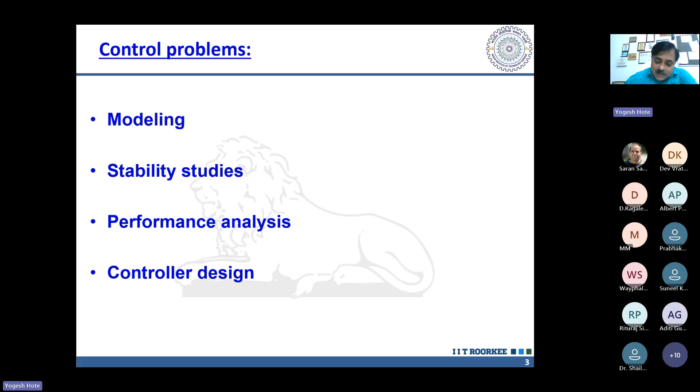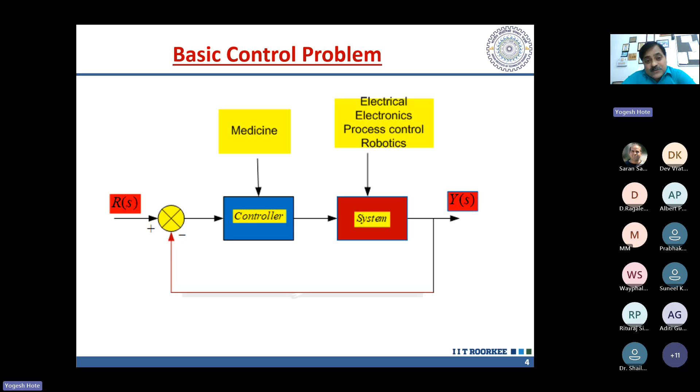According to my view, as the course belongs to power systems, there is a requirement of controlling voltage, controlling frequency, and economical balancing. Nowadays there is also the issue of cyber security related to power plants. So other than power systems, this control is helpful in all types of applications - let us say robotics, process control, electronics, everywhere. So according to my view, this control system or controller is the heart of all types of applications, because if your decision is not correct, everything will fail. Therefore, as a control engineer, we have the option to move to different areas, or work in different disciplines also. That's why control plays a very important role.

Then control theory research areas: classical control, adaptive control, optimal control, nonlinear control, and robust control. So there are different domains of control. Ultimately, our objective is to design a control system for achieving a desired objective with minimum time and energy - that is the ultimate aim of all these techniques.

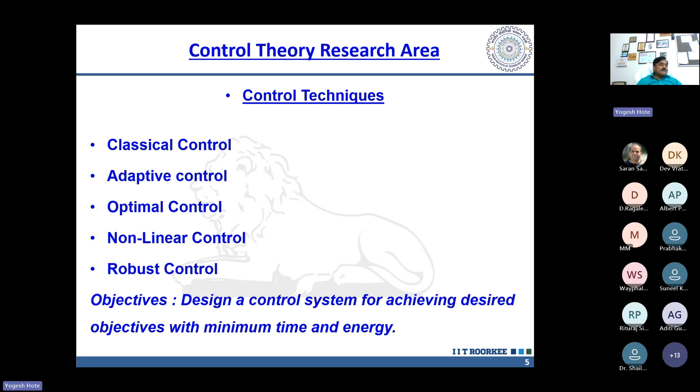Now we go with robust control. Initially we try to understand why robust control is important.

Now you can see a simple feedback control system. H we can say is a certain type of gain. G is the plant, and K is the feedback controller, or feedback gain. So we can interchangeably take any values. Now simply I have taken H equal to 1 by (S minus 1), G equal to (S minus 1) by (S plus 2), K equal to 1.

Definitely in our UG class we'll see such type of example, and we are trying to obtain a performance - how to obtain the performance. We have to check the performance. Simply, what to do now? We have to see if this plant is working properly or not. We have to determine output with respect to reference, Y of S by R of S. Is it correct? We will try to obtain Y of S by R of S.

Yes, okay, so now we have made some simple programming. We have taken plant H, with numerator, denominator, system transformation. Then plant G - you can see this plant G, H and G - we have numerator 1 minus 1, denominator 1, 2. Then we obtain the transfer function. So SYS and SYS1 - this is basically G and H. So now they are in series. I think most of you are aware of MATLAB programming.

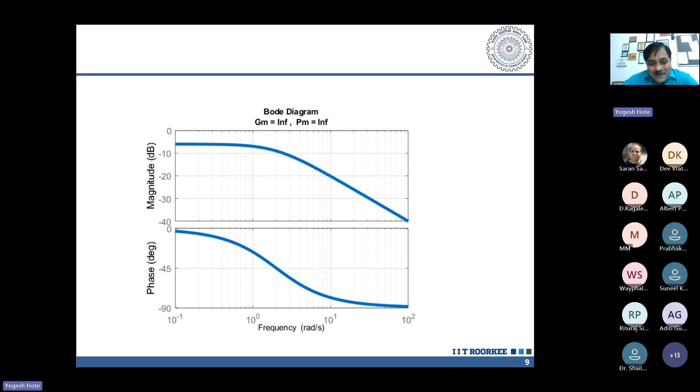Is it the same system? Yes, that's what I'm saying - same thing, same plant. You can see, you can also try yourself. The same plant I have taken. You can see, I have taken H and G, same plant, and this Y of S by R of S I have taken.

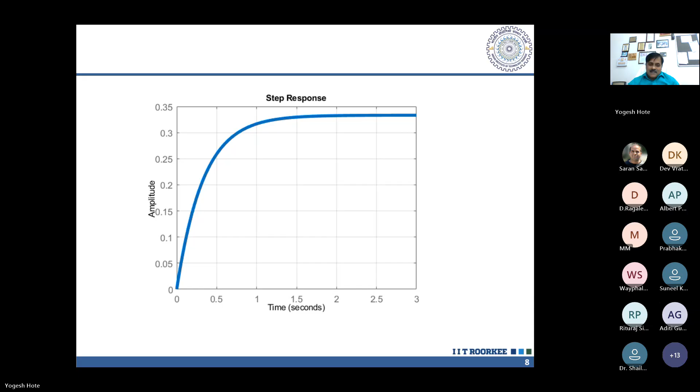And that's why I have shown everything to you with all the programming and all aspects included, so that it is clear to everyone. And this is the response: gain margin, phase margin, infinite.

Then I have taken Y of S by D of S, H and G like this, and the system is unstable - the result is unsatisfactory.

Is it visible? My screen visible to everyone? Hello, participant? Yes sir, it is visible, sir. My point is clear, visible na? Visible sir. Yes sir. Please continue, yes sir. Yes sir. Is it okay?

No, I have shown a simple plant, I have not taken very complex things - very simple thing I have taken. Because ultimately, what I always feel is that after 25 years of service, if you think everything from a basic point of view, you can think more about the research. Fundamentals play an important role - that's why I have even taken the topic of fundamentals.

Okay, I will come across these results afterwards. Now we take another example. I have taken H, same H, G and K. Now my H is 1 by (S plus 1) and (10 S square plus AS plus 10).

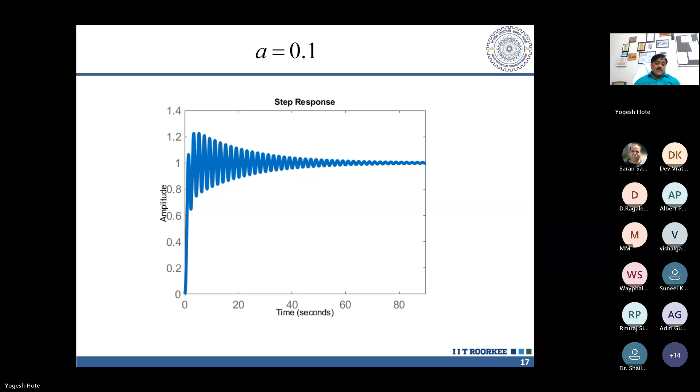So just assume here that H is one type of controller, and the parameter is changing continuously. So either this H should be adaptive type, or H should be fixed such that whatever changes happen in A, that controller will take care of this.

I'm repeating the problem again. Now my problem is my system parameter is changing continuously, A changes. So either I can change my controller H on a regular basis, or I can have H as a fixed controller.

Irrespective of this, you have a controller and we can get the desired result. Right now we observe that with H as one type of controller, we are not getting the desired results. So therefore, for this type of example, there is a need to design a controller. I hope this point is also clear to everyone.

Hello, what is your name? I forgot doctor. Yes, sir, hello Dr. Vishal sir, it is Dr. Vishal. Yeah, I'm monitoring sir, yeah Dr. Vishal. Yeah, so Dr. Vishal, is my point clear? What I want to say is we have the option: either we change the controller or design a control so that all the changes can be taken care of. Okay, so now this is one type of problem.

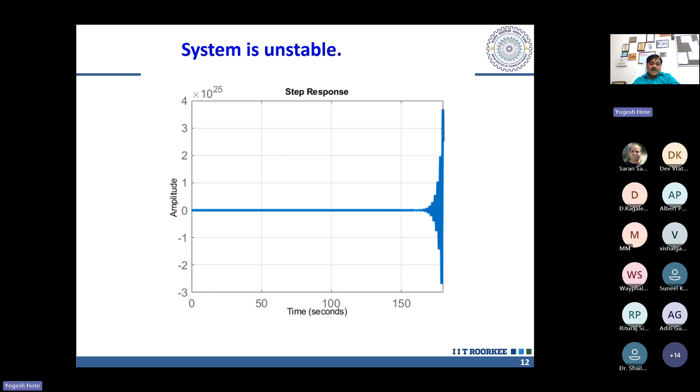Now again I have taken a problem. Here I have done stability analysis, and I have added one word called internal stability of the system, internal stable models. For the internal stable model, I have taken this same example from earlier, the Y by D of S example, on a similar track. Now we'll see the result from a mathematical point of view.

If you talk simply from a stability point of view, Y by R(s), the system is stable. But if you understand systematically from the internal point of view, that is Y(s) with respect to D(s), you can say the system is found to be unstable.

Anyhow sir, yes. So if you have the D, then I think the system is inherently unstable, but that instability thing is not observable if you consider the R alone. If you consider the R and also the D, then it is actually observable, and the system is actually unstable.

I have seen that it has a pole at -3 and 1, the closed loop pole. Yeah, okay. Minus 3 and 1. Yeah, okay, one minute.

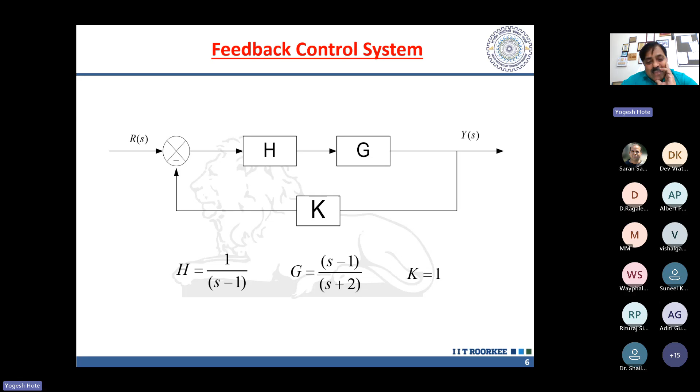If you take the same plant, clear, so if you take Y(s) by R(s), you will get the closed loop transfer function 1 by S plus 3. That's why the system is stable. But when we take Y(s) by D(s), this term S minus 1 will come in.

Similarly for this example also, this G is basically, I had missed this point, S plus 3. So Y(s) by R(s), we get S plus 3. But when we take Y(s) by D(s), we'll get in the denominator S minus 1.

So here the important point I would like to tell you is that when we want to design a robust system, our system should be perfect in all aspects. We have to take not only Y(s) by R(s), but output with respect to all types of inputs, whether disturbance or noise. For this specific example, it is observed that output with respect to R(s) is stable, but with respect to D(s) it is unstable.

I would like to ask one point: why for this specific example is the system found to be unstable?

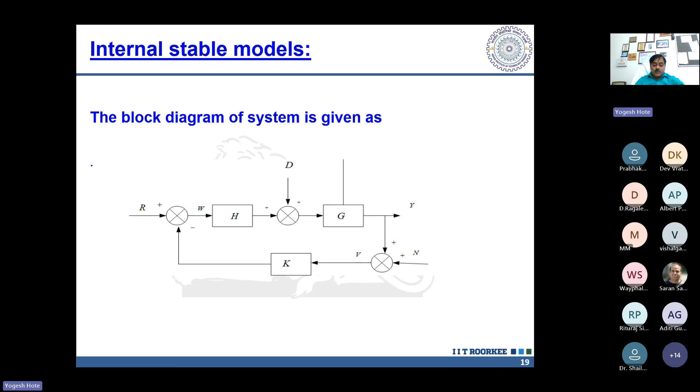So from the point of view of robust control, this indicates that we have to take output with respect to disturbance, with respect to reference noise, and whatever inputs are coming, we have to take output with respect to that particular input. In this specific case, the system is unstable because of the pole zero cancellation.

So here I have written this point: internal stability requires all signals within the feedback system remain bounded for all bounded input. Stability definition - when input is bounded, output is bounded. So when we talk about higher level stability or robust control point of view, internal stability requires that all signals within the feedback system remain bounded for all bounded inputs.

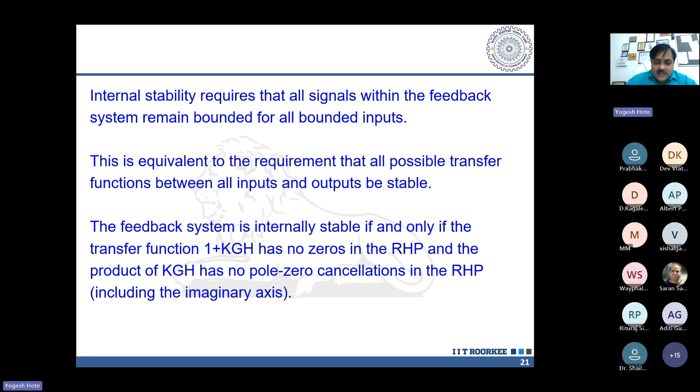This is equivalent to the requirement that all possible transfer functions between all input and output are stable. The feedback system is internally stable if and only if the transfer function 1 plus KGH has no zeros in the right half plane, and the product of KGH has no pole zero cancellation in the RHP, including the imaginary axis. So this is about the internal stability of the system. I hope this point is clear to everyone.

Effect of the delay. Delay is a very important challenge nowadays because everything is now automatic, so there is signal transmission - when signal goes from one point to another, there can be some issue of delay. Even the system itself has some delay, since it cannot start immediately, and that also produces delay. So robust control means your controller should take care of that delay also.

So here I'm going to explain this point with an example. I have taken K, 0.01s plus 1, e raised to minus 0.1s, with a delay of 0.1 second. I have done everything through MATLAB - I've written a command where the transfer function G has k as 10, and 0.1 is the input delay, specifically 0.1 delay.

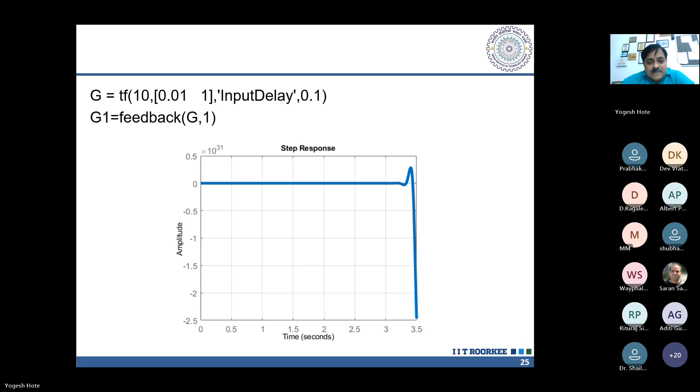So now we can see all this effect of delays, and then about pole zero cancellations, and here about the performance with respect to DS and NS. So then the additional point which has to be taken care of is effect of non-linearities, environmental effect, and some sort of measurement issues. So if you have a system which can handle all these particular points, then we call it a robust system or robust control system.

And in the control literature, there are some techniques available, called H infinity technique, LMI techniques, which can help handle this type of problem. And although we can observe that when we have a controller, let's say a fixed controller, which can handle all these things, that is called the worst case plant. So that means a lot of complexity may be involved when we go for the mathematical development for this one.

However, I will appreciate the organizing team who have taken up the topic of adaptive control, because instead of going for some fixed approach, adaptive can also be a very good choice. Sometimes the controller can change, and it will be a good option from the performance point of view, because our aim, everyone's aim, is to get satisfactory results.

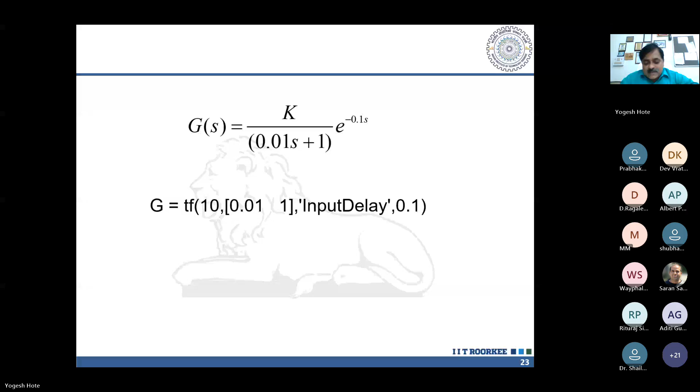You understood my point, Dr. Mukherjee? My point is that when you determine the gain margin, phase margin for a plant, let us say I'm going with this example - let me take one example. Let us say I have H equal to 1 divided by S minus 1, S plus 1.

Okay Mrigank? Hello Mukherjee. Now we determine the gain margin, phase margin, writing the command 1 divided by S plus 1. So is it gain margin, phase margin for 1 divided by S plus 1?

No, it's for the closed loop system. But here I am talking about a simple plant. I'm not talking about open loop control or closed loop control - I am talking about a simple plant, which can be open loop or closed loop. I am just taking the stability of this plant. Because this gain margin, phase margin - that is, you have a plant and there is unity feedback. That is the assumption, am I correct?

Yes, correct. So my point is simple: we have a plant, and for that particular plant we are determining the denominator, the pole of the denominator. So based on the denominator being on the left hand side, the system is found to be a stable system. But when I take the same system into the practical domain, that system may be found unstable. That is my view.

Practically. Although you can say, sir, that you are linearizing the system, and the system is actually nonlinear, and because of linearization something may happen - like that you can say. Am I correct? Yes, correct, you are saying that.

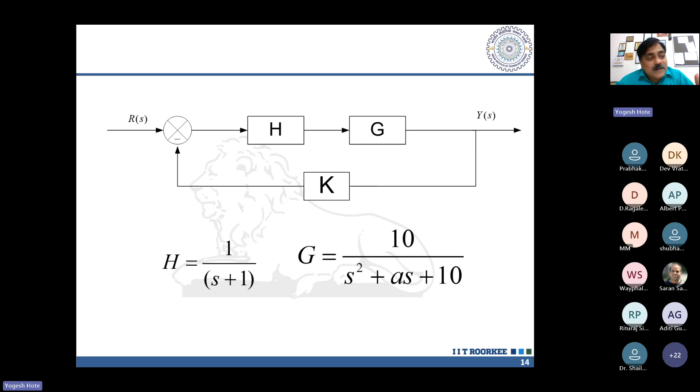But I am telling you that from the linear point of view also we can understand this phenomenon. Instead of thinking it's mostly nonlinear, from the linear point of view also we can understand why this happens. That is my point.

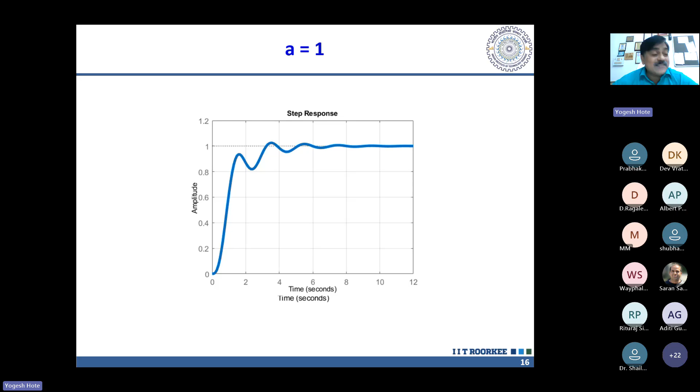Yes, correct - you mean pole zero cancellation. If you consider the noise that way, then some pole zero cancellation was happening because of that GH product, and we have also seen that the unstable thing is unobserved. But here there is no even pole zero cancellation - pole zero cancellation is a specific effect, one type of specific effect.

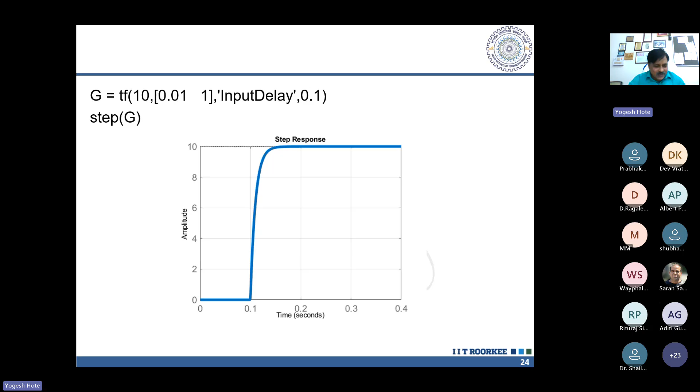Here I am not talking about a specific effect in a generalized manner - we are thinking in a generalized manner. If you have some noisy signal, then... No, you are correct, there is no noise, no disturbance, nothing - no noise, no disturbance, no time delay, no parameter variations.

Correct, nothing is there. It is simply a very basic fundamental thing, which is contradicted to what is the language of the book. Because here my statement, although it is my view, I cannot say it is a generalized statement - okay, it's simply my practical view.

In order to check the stability of the system, for absolute stability, zeros also play an important role - zeros also have an impact on this. Meaning, if you think of the system from a linearized point of view, the linear system may be stable, but the same system, when we go into the practical aspect, may be unstable, irrespective of noise and disturbance.

Okay, my statement is clear to everyone? Yes. Okay, so now I will try to explain this point this way. Is it clear? Simple plant: G of s equal to K, tau s plus 1. Is it clear? K is the gain, tau is the time constant.

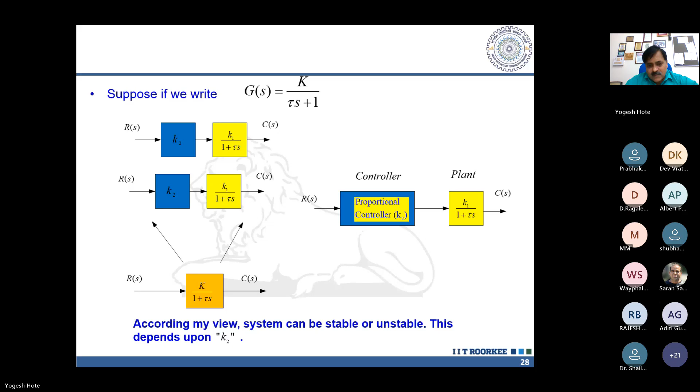So I return. As long as K is a part of the actual system, then we can say the first order system is stable. But now here I am giving my view: theoretically, root locus, Nichols plot, time response, and definition is correct, but practically it may not be correct. Sometimes, for system to system, the view can be incorrect. But anyway, this is my understanding, practical understanding. So now I'm explaining why I'm saying like this.

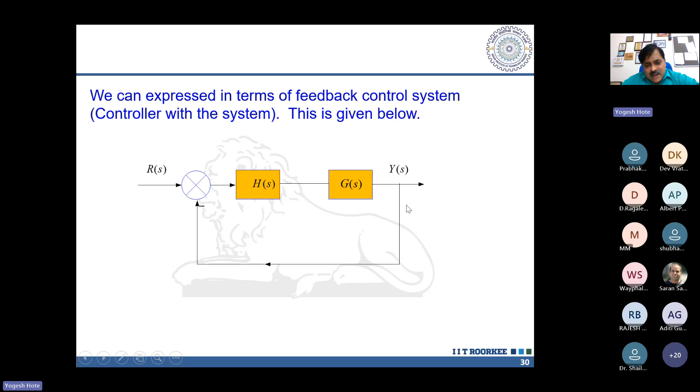Now, to understand this point, we have taken H and G, and a closed loop plant here. Same K, tau s plus 1. Same way I have taken this K involving K1 and K2, and this K2 is, let us say, variable, just like a proportional controller, just like a droop control which we have in power plants. So here we have a negative feedback. K2 is basically a proportional controller.

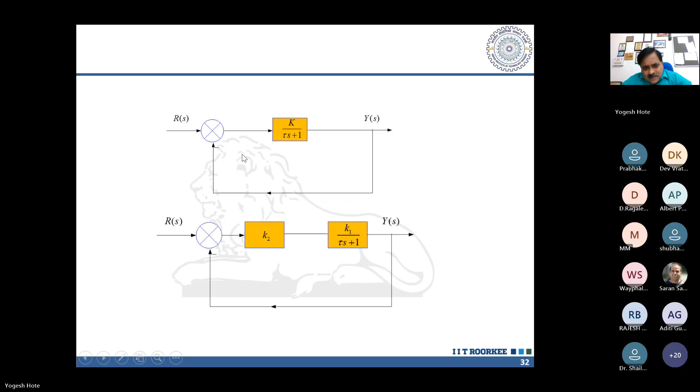So when I started my lecture, I told about what a control system is. The control system involves a controller, control input, actuator, system, and feedback. So now what has actually happened here practically, this K2 is a proportional controller, and the signal from this proportional controller is moving to the actuator now. In real time we cannot see the actuator, but practically the actuator is there, and this actuator will drive the system.

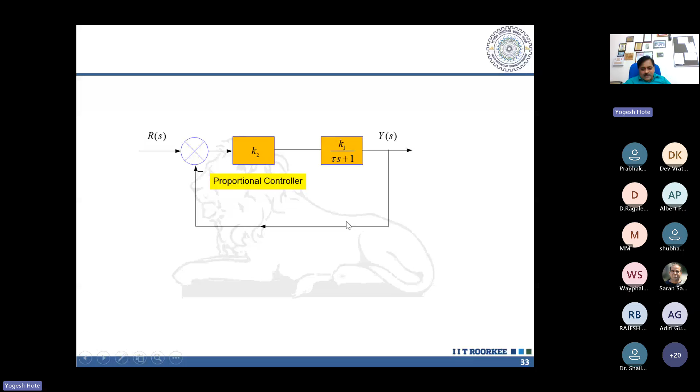Hello, Dr. Vishal, am I correct, or do you want to add something? Yes sir, you are correct. In the real time plant, what is the observation? My observation is that we have a controller giving control signal to the actuator, and the actuator drives the plant. Correct. So now here internally some actuator is there, and K, tau s plus 1, and Y(s) by R(s). So now here I am saying this K, control input, control signal is given to the actuator which will drive the system.

And now here, is it visible properly, this screen, this result? 1 by s plus 1, and my K is 100 now.

But now as a control engineer, we not only handle the stability, numerator, denominator, we are not only handling noise and disturbance, we are checking the performance. Always the control engineer sees what type of control input is coming. So the control input has to drive the plant, and practically it is not possible that all the control input will be driven by the actuator.

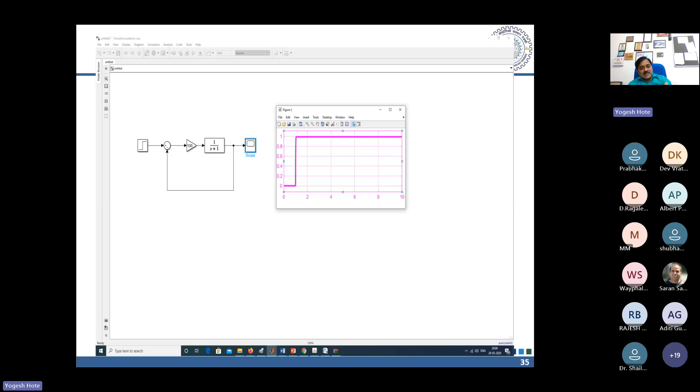It never is possible that it will drive the actuator completely. So here we can see the control input coming from here. Practically, the control input coming from here is, say, 100. And you can see if you provide such a control input to your actuator, the actuator will not work, or it can damage the actuator. This is my observation on this.

Therefore, my point is that theoretically, stability depends upon poles and zeros, but practically the control input always plays an important role. This is not even just in closed loop, even open loop also involves a controller or plant. That control input is there, and that control input may damage your actuator.

So Mr. Mukherjee, hello, yeah correct sir, I understand what you are saying. You understood my point, huh? Yeah, depend just upon, like yeah, that. You are from which place, Mukherjee? You are from Bengal originally but now in Mumbai? Good, okay no problem. So one day I may come to Mumbai, maybe next month, clear? So will you invite me for some lunch or dinner? Yeah, okay, you will invite me definitely. Then we will go to a good hotel, Taj Mahal Hotel, okay I will sponsor this, we will go there.

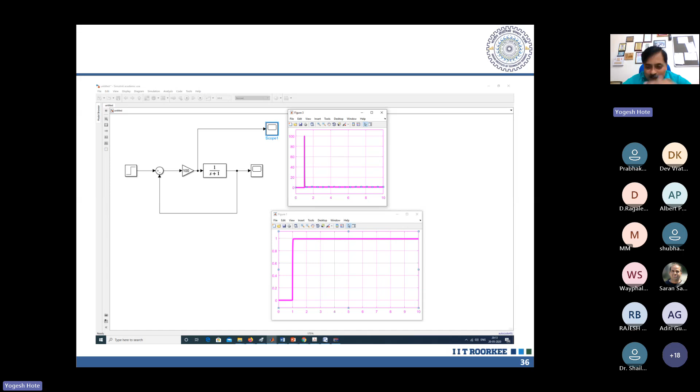Hello, Mukherjee, huh, yeah now you may, initially you gave me 4, you told me accept sir take 4, then you said sir you can add more additional 2, that is 6. So even though I am perfect, I am stable, what you are doing, you are adding up something. And lastly you can say to me, you can say take 10. So you can see everything is stable, you are adding more and more to me, clear? But at one particular point, I will say no to you.

So now, even though I am thinking of this from my point of view, practically this can happen. Similar thing, just I have given an example, similar thing happens, clear? So even though we have a plant from a theoretical point of view, you can get stability. But when thinking about the practical point of view, practically some actuator is required, and so some instability may happen.

So therefore my point is that suppose we are doing analysis from the transfer function point of view, there can be some problem of stability, even though from a theoretical point of view the system is found to be stable. So you have to always monitor what type of control input is coming to us. Sometimes in our research articles we can get good publication with good response, okay, but what type of control input is there, that is also important.

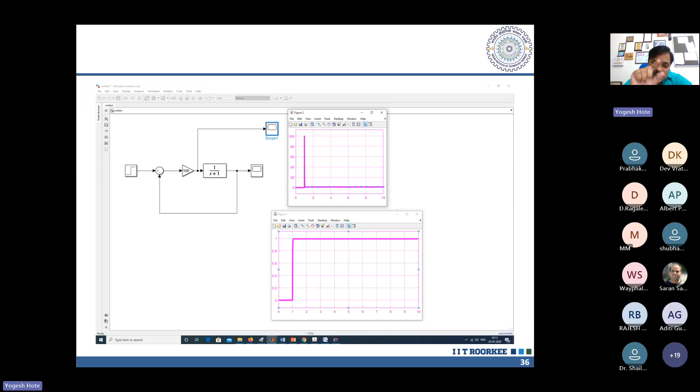So sometimes even in review, when we publish papers, the reviewers may always ask what is your control input. That control input needs to be checked. It should be under a certain limit so that in a practical control system we get the desired result. So, Dr. Arvind, is it okay?

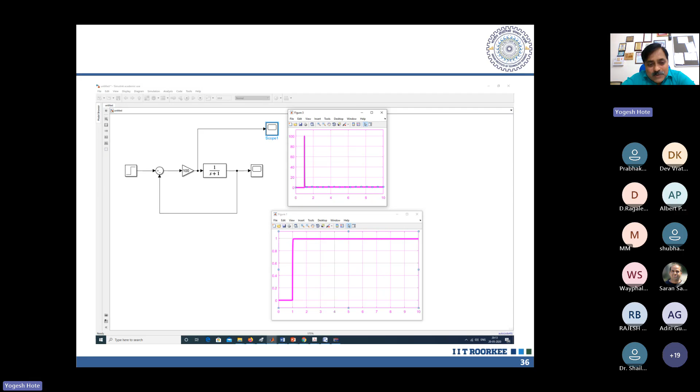Or do you want to add more point here? No sir, I think you are correct sir. Like in practical systems, if we give more input than the rated limit, then the system definitely will become unstable, sir. Unstable, but theoretically it will be stable because from a mathematical point of view. Yes sir, yes, okay.

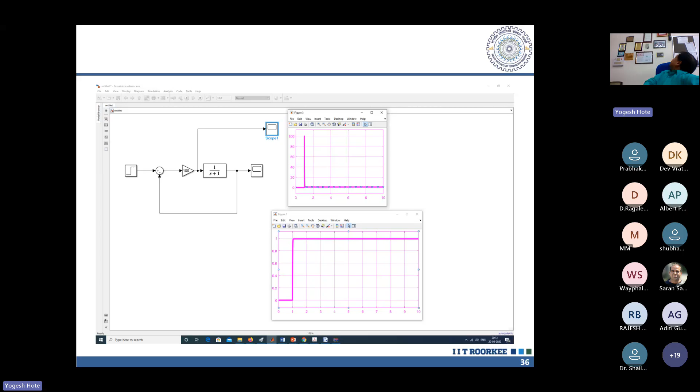So that is the view. So all the participants who are like to work in control domain, or anyway, control is important for every system. So always check what type of control input is coming before going for real time application. So ultimately my conclusion is that stability of the system depends upon the pole of the denominator, but practically stability depends upon the poles and zeros, that is the gain of the system.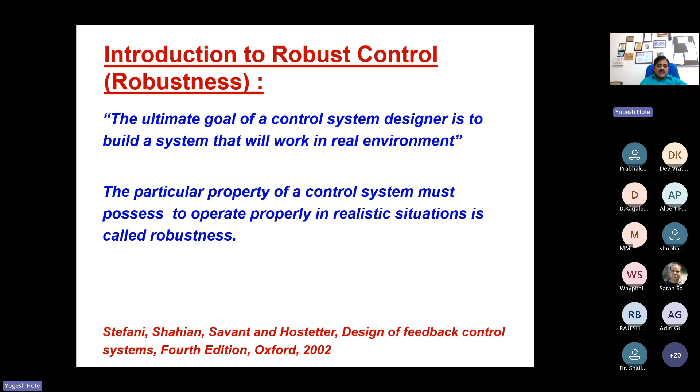Now we come to, ultimately I want a definition of robust control. What do you mean by robust control? The ultimate goal of a control system designer is to build a system that will work in a real environment. The particular property a control system must possess to operate properly in a realistic situation is called robustness. So you can see this book, the definition is given.

So now an example here: a controller must perform satisfactorily not just for one plant, but for a family of plants, just like G of S equal to 1 over S minus B. So for B equal to 1, a controller can be designed for our system. Practically the system should be stable not only for one particular value of B, but for all values lying between 0.1 to 1.4.

In addition, the system has to satisfy performance specifications such as steady state tracking and disturbance rejection for all values of A in a specified region, so that we have robust performance. That means the system should not only be stable for one particular value but all values, and for all values it has to take care of steady state tracking and disturbance rejection, even if noise is there. Then we can say the system is robustly controlled, or has robust control. That is, it involves robust stability and robust performance.

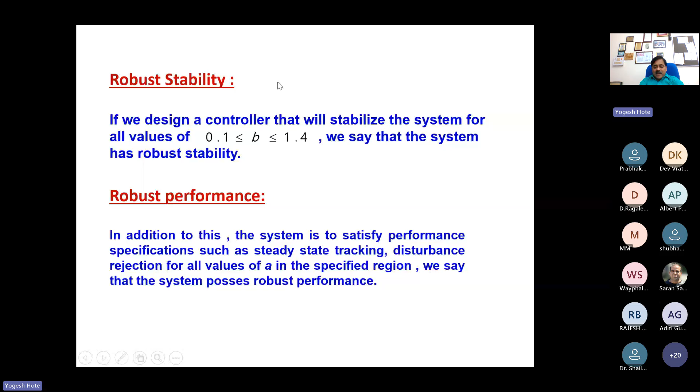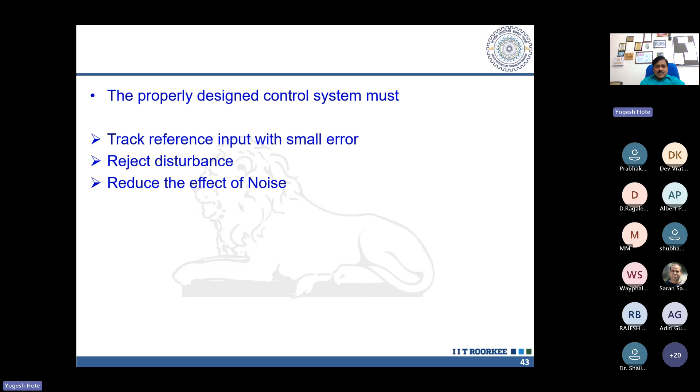Now because of time, since we have 2 hours, I'm skipping some slides, and I already explained that we have to determine Y with respect to R, S, N. So the mathematical part is there. I'm skipping this part and coming to an important theorem of robust control theory.

One important theorem is the Kharitonov theorem, which is very important from the robust control point of view. What is this Kharitonov theorem? It says that a whole family of an interval polynomial with real coefficients is Hurwitz if and only if four specific well-defined chosen polynomials are Hurwitz. Thus, by merely testing the stability of four polynomials, we can ensure the stability of the class of polynomials.

Here I am saying that your plant has some uncertainties or varying parameters. When the parameters are varying, if we simply check by trial and error, we have to check more than 1,000 plants or more. Even then, we don't know whether the system is stable or unstable, because if even a small value is missing, the system is found to be unstable. So this Kharitonov's theorem is a very good theorem.

It's a benchmark theorem from the control point of view, or application point of view. This says that in order to check the stability of the system, we need only four polynomials, and those four polynomials are called the Kharitonov polynomials. This is an important theorem, particularly when we call the system interval, when parameters are varying. So here...

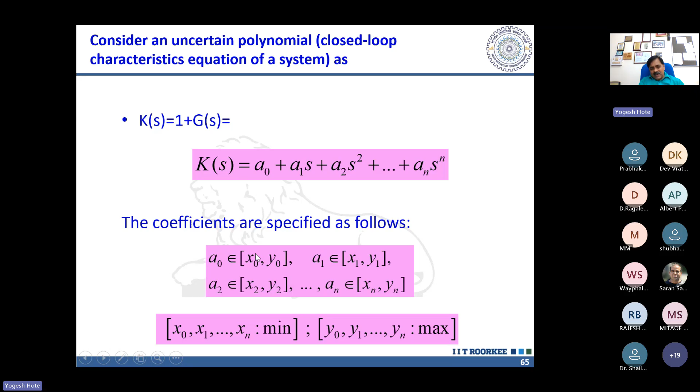And the third polynomial, we take first maximum, then two minimum, just like x1, x2 minimum, then two maximum, just like y3, y4. And last polynomial, two maximum, y0, y1. You can see x indicates minimum, y indicates maximum. So two minimum and two maximum values are to be taken.

And you can see the condition: minimum, minimum, maximum, maximum, minimum, minimum, maximum. Here, this K1, you can see K1, two minimum, two maximum, two minimum. Second, minimum, two maximum, two minimum. K3, maximum, two minimum, two maximum. And K4, maximum, maximum, minimum, minimum, maximum.

So this is the arrangement explained or given by Kharitonov, and he said that only four polynomials are required for checking the stability of the system, and that gives necessary and sufficient condition for stability of the system. Particularly if you talk about the Lyapunov criteria, which you might have studied, that only gives the sufficient condition, but this Kharitonov theorem gives the necessary and sufficient condition for the stability of the system.

We can see through a simple numerical example: G of S equal to K, over S plus A, S plus B, and you can have a parametric range varying, K has some range 200 plus minus 20, A equal to 4 plus minus 0.5, and B equal to 6 plus minus 1. So these are the variations in the parameters.

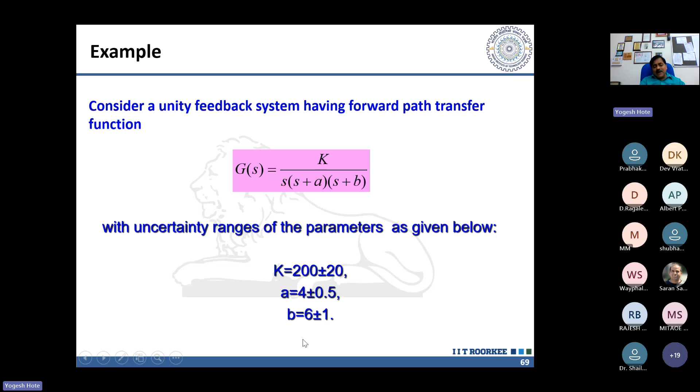And then we have determined the closed loop characteristic equations, and this is an uncertain polynomial. Then we are converting this into an interval polynomial. Let's see, this is interval polynomial A3, A2, A1, A0, and here we have independent uncertain polynomials.

So this is basically an independent uncertain polynomial: 180 is the minimum, 220 is maximum, 17.5 is minimum, 31.5 maximum, 8.5 minimum, 11.5 maximum. And to this independent uncertain polynomial, just like the procedure I told you earlier, we have to determine the four polynomials, and these are the four polynomials determined by a theorem called Kharitonov's theorem.

We require four polynomials. So here minimum, two maximum, minimum to maximum, and here maximum to minimum, and maximum minimum. It's the same arrangement which I told earlier. This arrangement has been used, and you find that for this example, the first two polynomials are stable, the third one is unstable, whereas the fourth is stable, and ultimately the system is

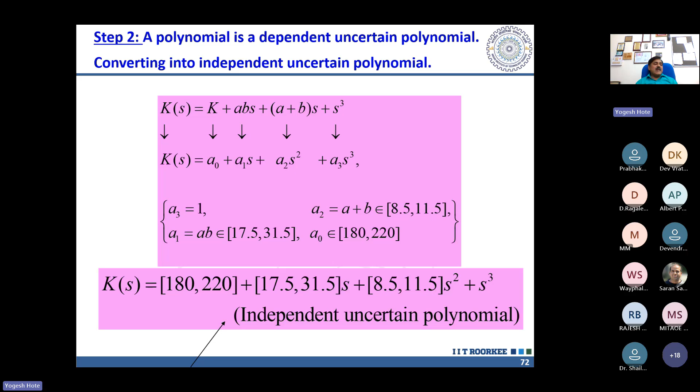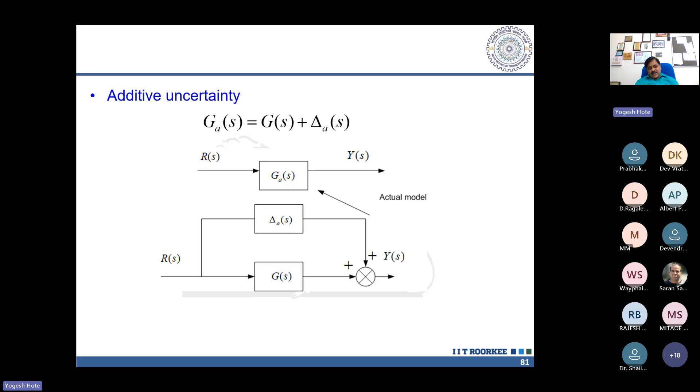I feel that this is a very simple theorem which can be helpful from the industrial point of view. Although there are some other theorems, just like the small gain theorem, which can also be helpful in handling the problem of robust control.

Because of the limitation of time, I'm going to directly discuss the small gain theorem, say G(s) and H(s). We can say G is a plant and H(s) is some type of uncertainty. And if you use this Nyquist plot, magnitude of G(s) and H(s) must be less than 1.

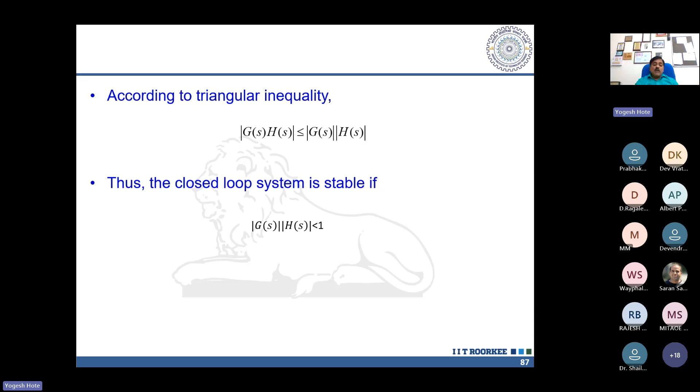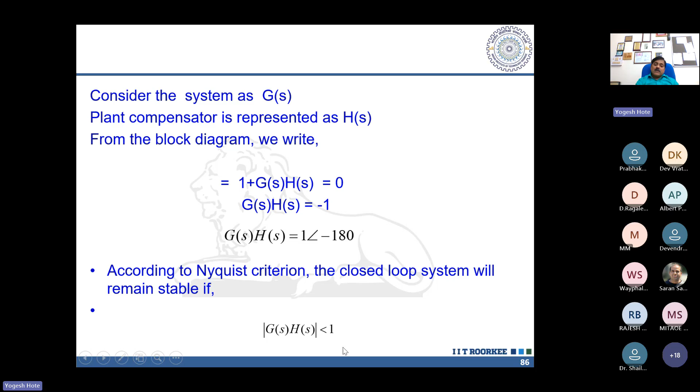So the concept involved: you take G, see the disturbance here, and in case of Nyquist plot, we have unity feedback. Here we have H in the feedback, which is one type of uncertainty. So G and H, the magnitude or norm of this must be less than 1. If it is there, the system is found to be a stable system.

So this is all about the robust control, stability issues, and fundamentals involved. Now, today the important issue is cyber security norms.

Particularly, your topic is on the power plant. So many techniques and approaches are available. The challenge is cyber security, because your control is stable, everything has been done, but some additional impact has come which is not known to us. Then how to handle this one?

My observation is that our control theory can also be helpful. Nowadays there is an era of AI, artificial intelligence, and so many concepts are available through AI for cybersecurity applications. But my personal feeling is that there is still an important role for control in the cybersecurity issue. Cybersecurity detection can be done easily, but for mitigation purposes, your control theory or robust control technique can be helpful. So this is all about these things.